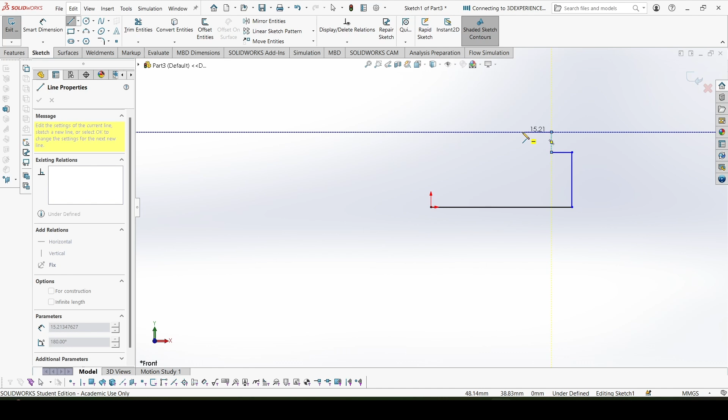Let's go to sketch on the front plane. Let's first make the front view as it is shown in the PDF. So we'll take the line feature and create the boundary. The rough sketch is created. Now we'll give all the dimensions as shown in the figures.

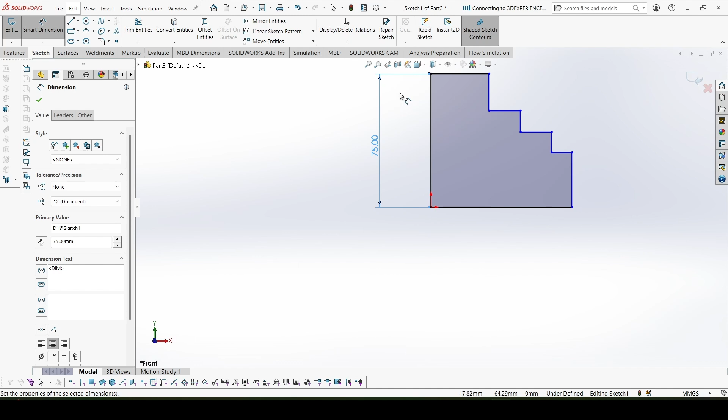This is 75. This is 20. This is 12. This is 12. No, not this one. This one is 12. Then this is 12. From here to here it is 20. Then this is 30.

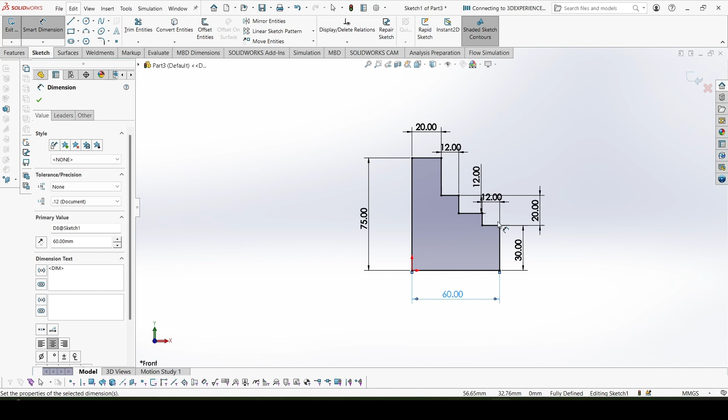And this is 60. Okay, so the boundary is completely defined, as the sketch is black; all the lines are black, so we can say that it is completely defined now. We'll also put the circle here for the hole. Its diameter is 12 and the distance from both the sides is 16 mm.

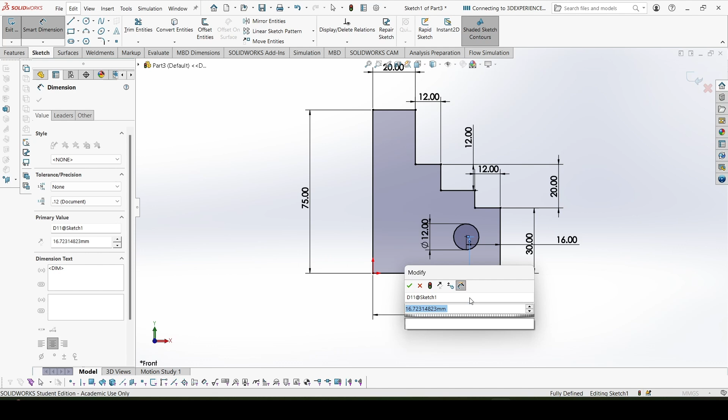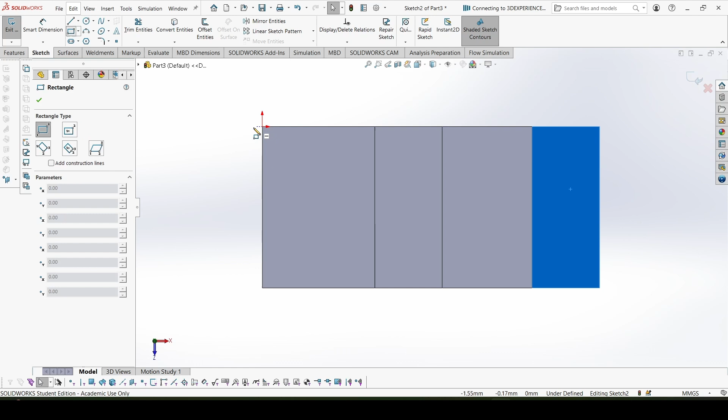This is done. Now we need to extrude. We'll make the extrusion of 28 mm as shown in the top view. Now we need to cut what we don't need from this part. So we'll start our sketch on this plane. We make a rectangle. Give this dimension as 20 mm as shown in the top view.

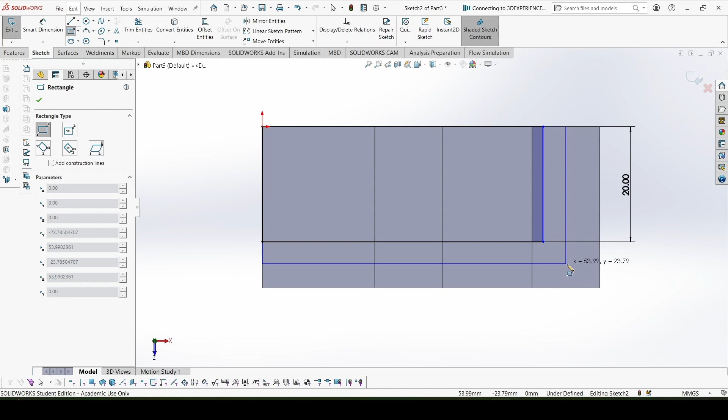We don't need to give this dimension because when we cut you'll see, and we'll have to make another rectangle because we need to cut the outside of that inner rectangle. So this would be the rectangle. Now let's go to the extrude cut. Select these contours, flip the direction and through all. Okay, cut. So we have got the part in just two features.

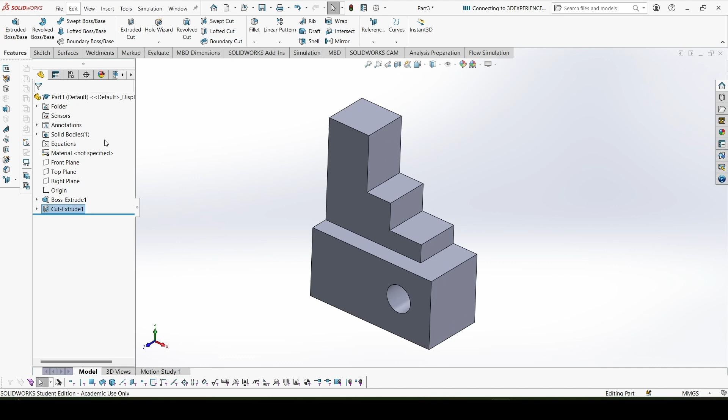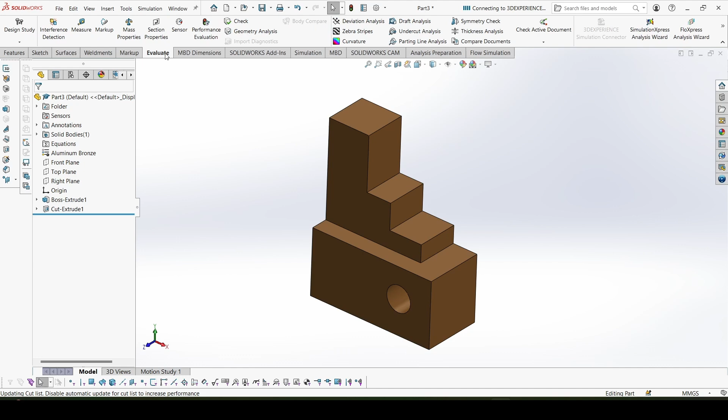Now let's give the material properties. The material needed is aluminum bronze. It is available in the copper alloys, aluminum bronze. Apply and close. So the material is applied. Now let's evaluate and check the answers. So let's go to this PDF. In the end we are given all the answers.

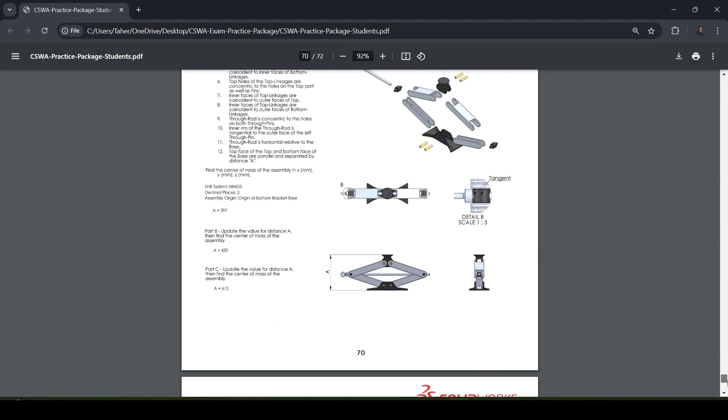So the first is 537.14 grams. Let's check. 537.19 grams. The error is much less than 1%. So yes, this is correct. The difference might be because of different software versions. And the first part is over.